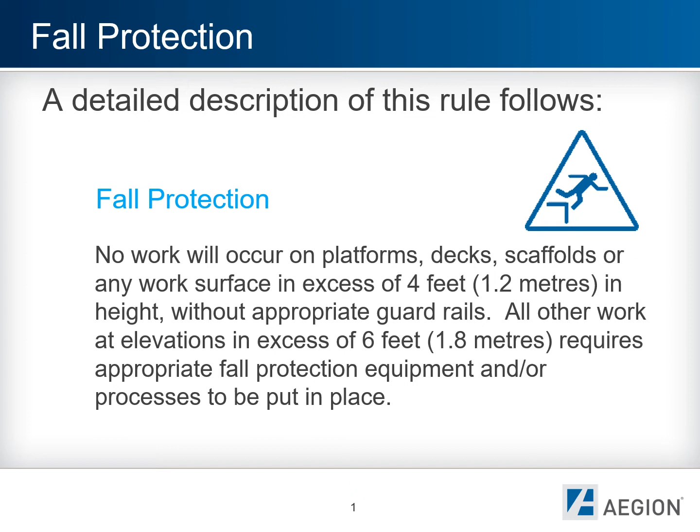I largely became interested in health and safety from my experience as a worker in automotive industry, geotechnical and construction related industries, and even some in warehousing and manufacturing types of industries.

I always prided myself in being productive, and the injuries that I suffered during some of those work times really affected my ability to be productive and got me interested in health and safety overall. I'm not sure exactly how I got into academia, but here I am.

I still enjoy working out in the field and helping others. Some of those injuries that I suffered, I've seen much worse in others, and so we really do need to look out after each other, and fall prevention is one of those that is really critical.

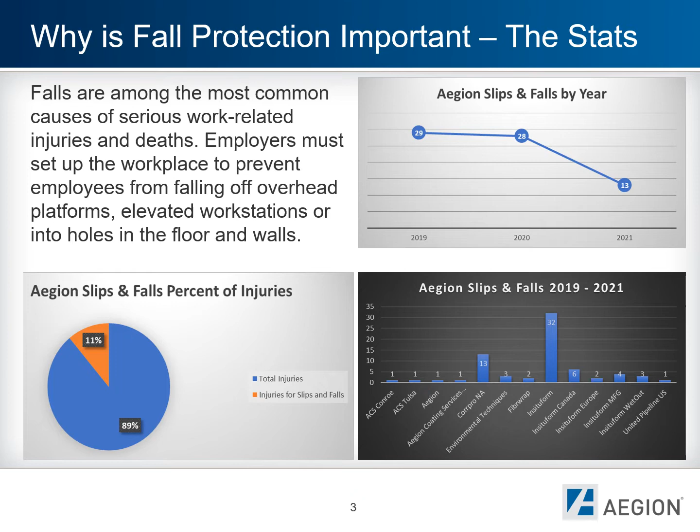The hierarchy of working at heights. Number 1, eliminate the hazard. Can the task be done at ground level?

Number 2, passive fall protection. Use of guardrails, where minimum training is required.

Number 3, fall restraint. Use of a fall restraint system required to protect the worker from coming in contact with the leading edge. A written rescue plan is required.

Fall arrest. Personal fall arrest system is required. That includes a harness, an anchor, and a connector. Full training is required, and a written rescue plan is required.

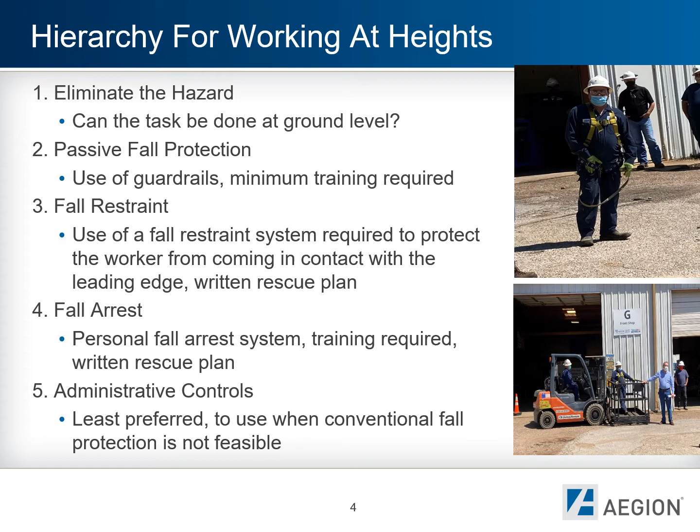Last, number 5, is administrative controls—the least preferred to use when conventional fall protection is not feasible.

Eliminate the hazard by working on the ground. Most of our work days are spent with our feet firmly on the ground. At ground level, our tools and our work surfaces are within easy reach.

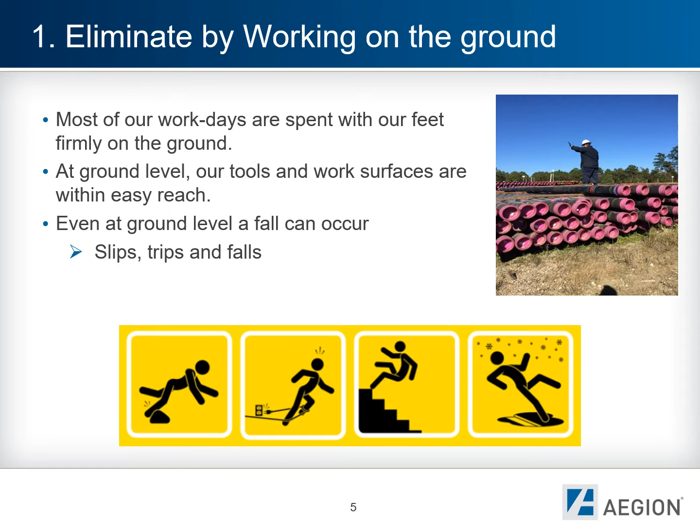Even at ground level, a fall can occur. A slip, a trip, a fall. Tripping on something in the field, unknown that is there in bush, housekeeping in the office, tripping on a cable or a cord that crosses a walkway, falling up and or down the stairs, not using the handrails for support, a slip in the mud, in the snow, on an icy surface.

Passive fall protection. When we look at installing a passive fall protection system, it is a great way to reduce overall training requirements by building a physical barrier between the employee and the hazard. Once installed, there is a minimum investment to keep it working for years. It can also be a temporary setup or permanent installation at a location. It really just depends on how often you are requiring it.

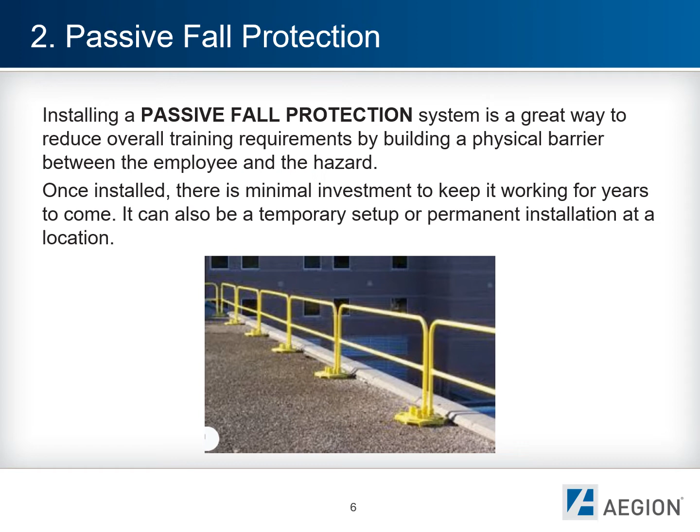Number 3, fall restraint. Fall restraint typically uses a system that is similar to a fall arrest system. Workers use a full body harness and a lifeline that tethers them to an anchor point. Fall restraint systems typically use fixed length lifelines connected to an anchor point, which restricts the worker's movement so that they can't reach the leading edge and fall to a lower level. Fall restraint systems can sometimes give workers the ability to reach closer to an edge than guardrails while still preventing the risk of a fall event from occurring.

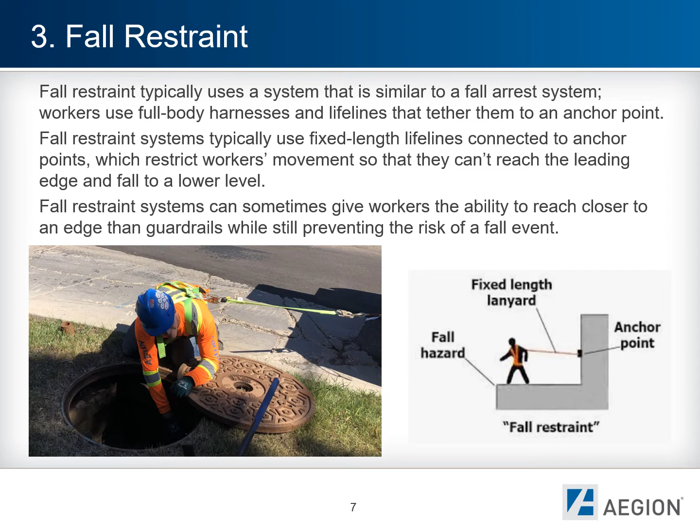Fall arrest systems are not at the top of the hierarchy because of the use of a personal fall arrest system, as it still poses some risks. A fall arrest system can protect the worker from falling to the lower level, but that worker must be rescued quickly to avoid other risks, other injuries. Internal injuries are critical to prevent when a fall has happened. Quick recovery and rescue is imperative.

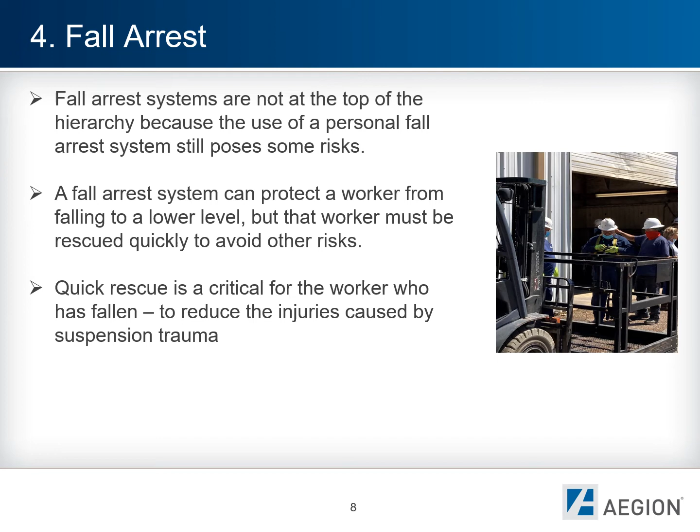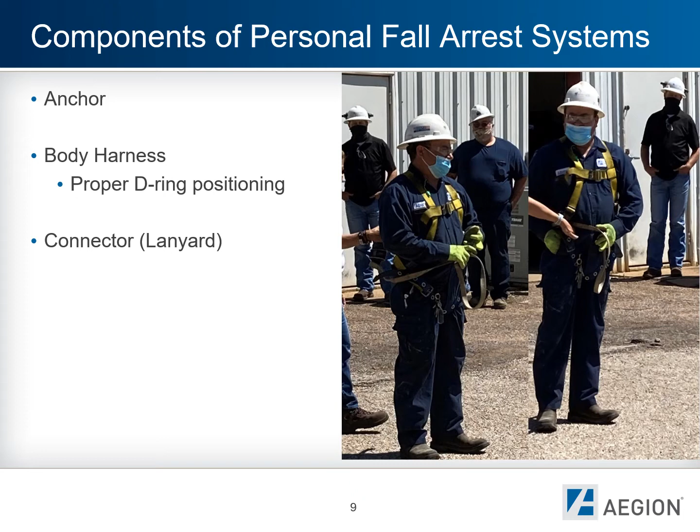A full body harness for fall arrest must be carefully designed. Injury may be sustained by falling in a poorly designed or poorly fitting harness. A properly fitted harness must distribute the force of a fall in areas of the body that can withstand high shock loads. It's generally best to transfer the shock load to the pelvis area. A full body harness must be able to adjust to fit a variety of workers, correct a head-first fall, and suspend the wearer in an upright position after the fall.

A few common features that will be included in a well-designed full body harness are a secure chest strap or crossover style. This is critical for righting a head-first fall. A rear dorsal D-ring. Multiple adjustment points.

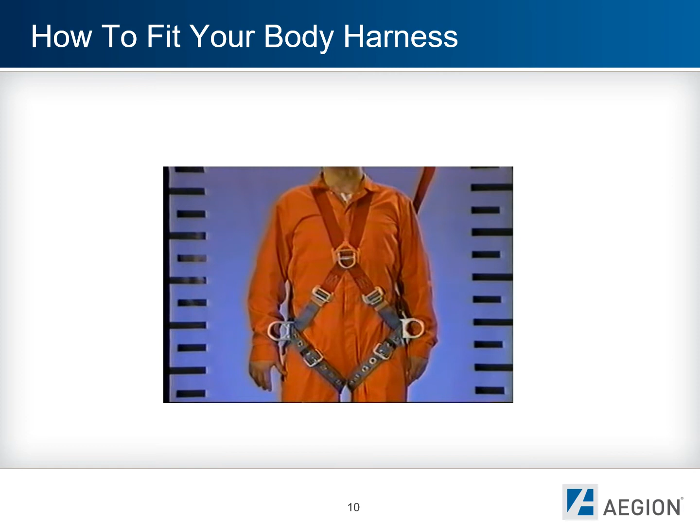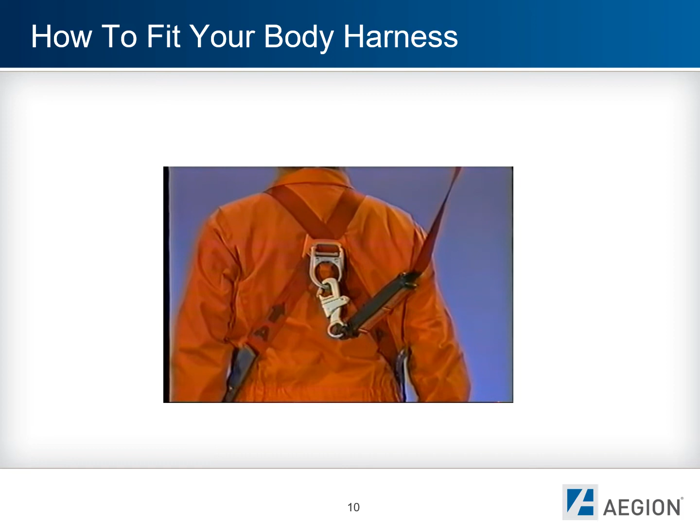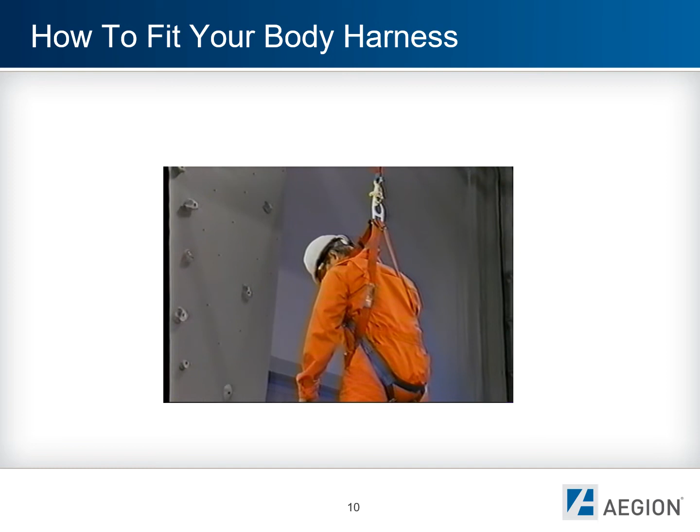Although there may be a variety of D-rings on a harness for different applications, a personal fall arrest system is always connected to the dorsal D-ring. This high attachment at the rear of the harness transfers the impact of a fall to the body effectively and suspends the user in a slight forward lean. This position is best for a worker who loses consciousness. It is important to use only a dorsal D-ring for personal fall arrest. A shock load on a front D-ring may invert the worker, risking injury and positioning him or her poorly for prolonged suspension.

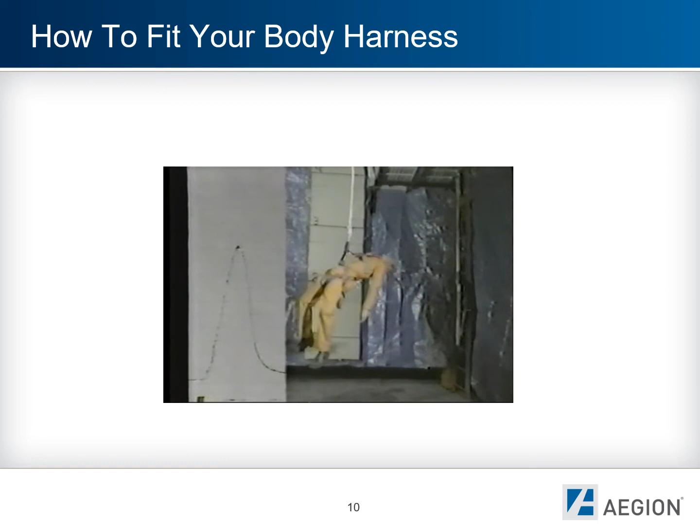Harness adjustment is critical. Always follow the manufacturer's recommendations for fitting. A loose or ill-fitting harness will not distribute the fall force as designed. Different fall protection situations will warrant specific types of full-body harnesses. It is always best to consult the manufacturer for the type of harness available for your specific situation and needs.

When we look at placement of that anchor point, we have hazards that we need to be concerned about. One significant hazard is swing fall. Swing falls are not as fun as they may sound at first. In fact, in all seriousness, swing falls can be extremely dangerous. Unfortunately, many people, when working at heights, fail to take swing into consideration.

So just what is swing? Swing is what occurs when you are wearing a personal fall arrest system that is not anchored directly overhead. If a fall should occur, you would swing like a pendulum back towards the anchor point. In the process, you could strike with great force the structure you are working on or another nearby structure.

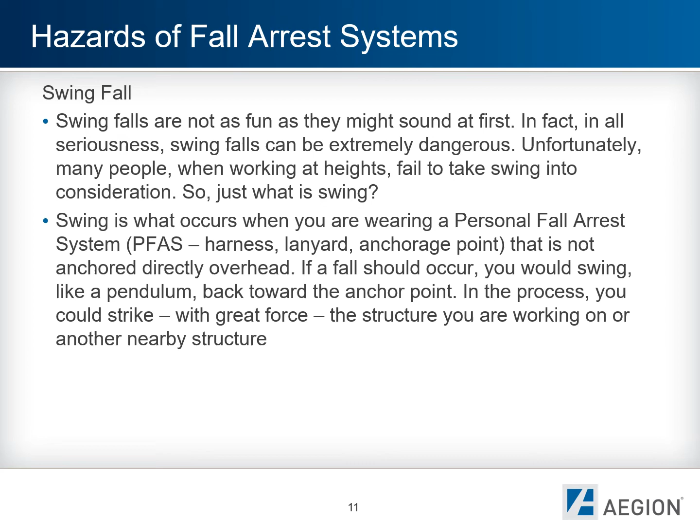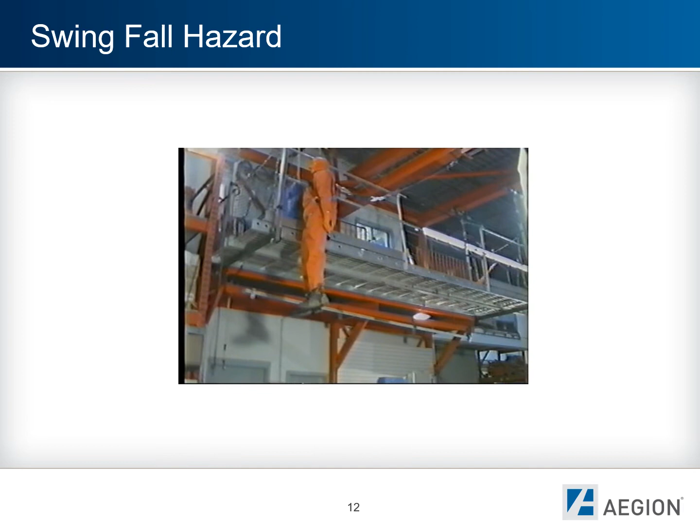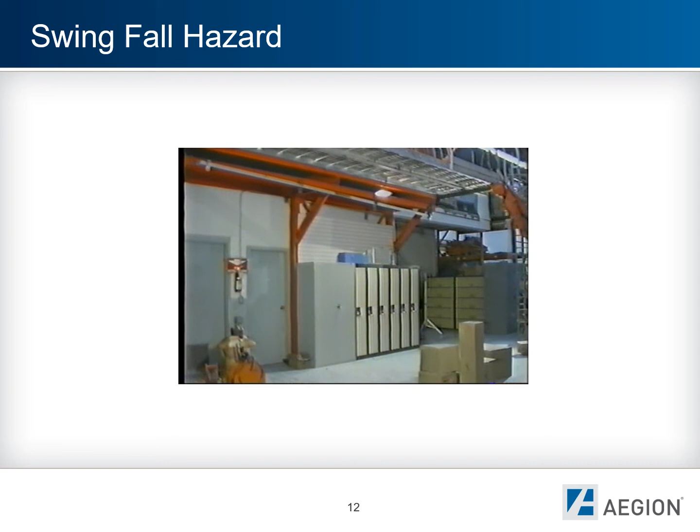It is possible for a worker to get into a swing fall situation. A long lanyard might be required to give the worker more mobility, but it tempts the user to move too far away from the anchoring location. A fall in this location can produce a swing fall which may be just as dangerous as striking a lower surface. In the event of a fall, the worker swings like a pendulum. If there are any obstructions, the worker may strike them as he swings.

Administrative controls. The last step in the fall protection hierarchy is administrative controls, which is the least preferred solution and not recommended as the primary method of fall protection if any other solution or system is possible. Administrative controls do not provide any actual physical protection to the worker. Instead, they are work practices and procedures that train workers on how to avoid fall hazards. This approach leaves the safety of individual workers up to their own actions, which is why safety professionals recommend using more preferred methods unless it is absolutely necessary to rely on administrative controls.

Please reach out to your safety department to work through this process.

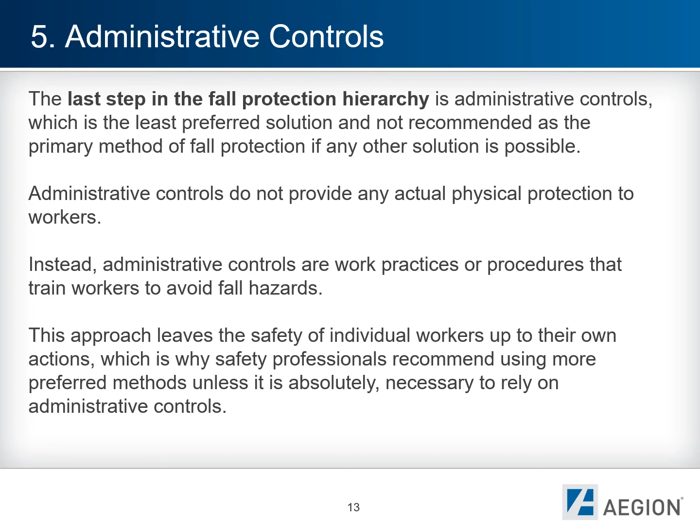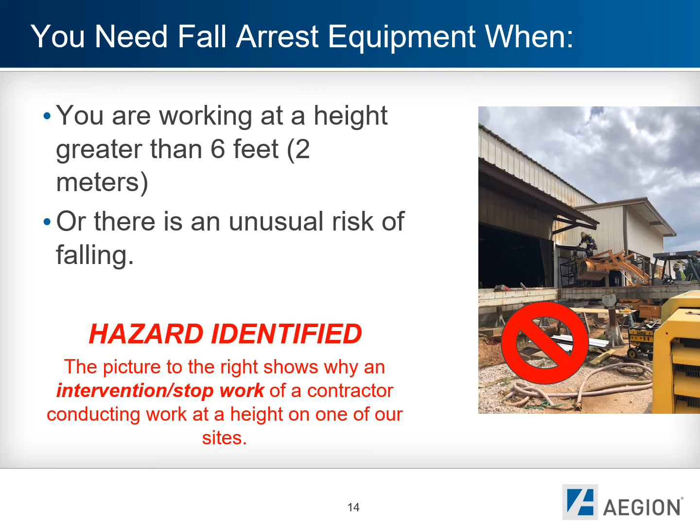How do you make sure the equipment works every time? Inspect fall arrest equipment before you use it, every time. There should not be any evidence of tears or cracks in the lines, in the webbing, in the strapping, ripped stitches or burns, bends to the buckles, or alterations of the equipment. Ensure it is fitted properly, and ensure that the setup of the fall arrest system is correct for the application. Inspect your equipment after you use it to ensure it did not get damaged as you were working.

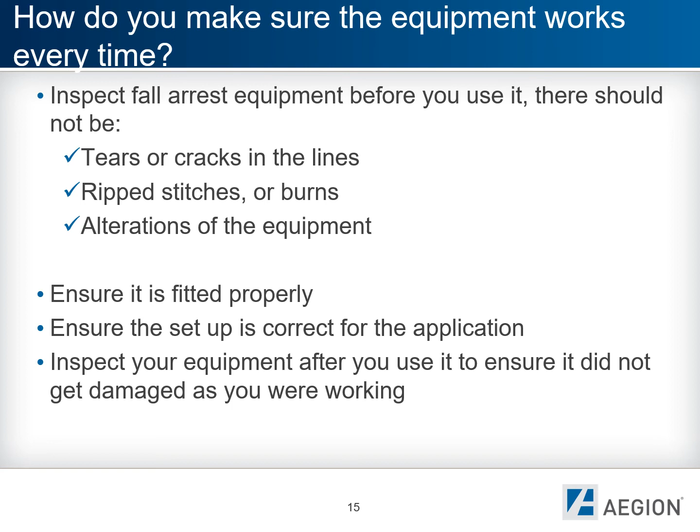Other ways to save your life: Do not use knots to shorten the lanyard. Get a shorter lanyard. Connectors keep you safe. Snap hooks that are self-locking are mandatory. Check to confirm they are working correctly. D-ring proper placement is critical, make sure it's centered between your shoulder blades. Keep the line away from sharp objects and edges.

Overall, ask if this work can be done by not working at heights. Can it be done at ground level?

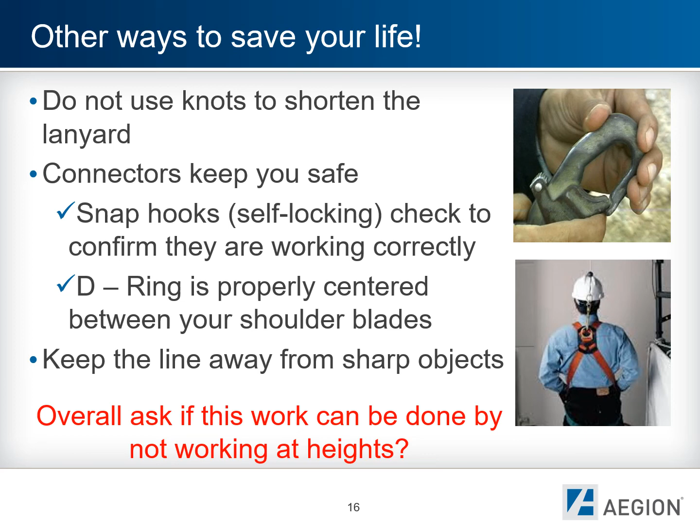It's your life. Stay safe. Know your work area. Know your fall arrest system and its limitations. Use the right system and setup for the work you are doing. Make sure your equipment has been inspected and is in good working order. Report problems. Do not try and repair fall arrest equipment. Listen for, watch for, and recognize hazards.

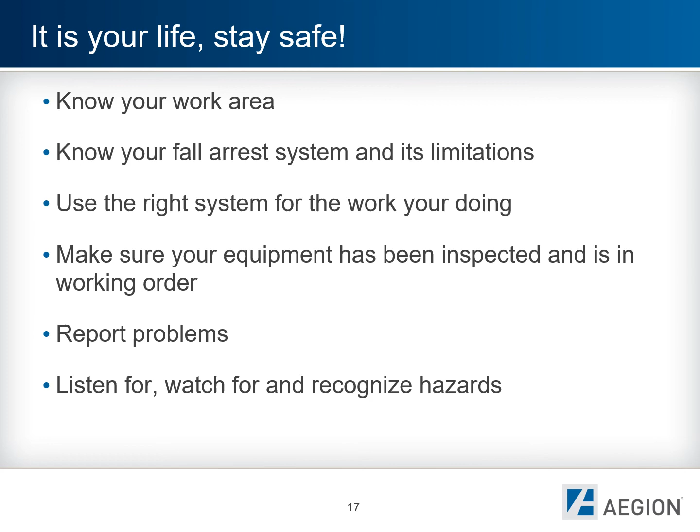The anchors should be placed as high as possible and used with the shortest practical lanyard to limit free fall. A full body harness is the only acceptable body holding device for fall arrest. It is critical to fit the harness correctly, connect to the fall arrest system with compatible hardware, and follow the strict recommendations of the manufacturer.

And finally, a fall arrest system is not complete without a rescue plan. It's up to you to take fall protection seriously. Remember, this could be the best decision you make in your life.